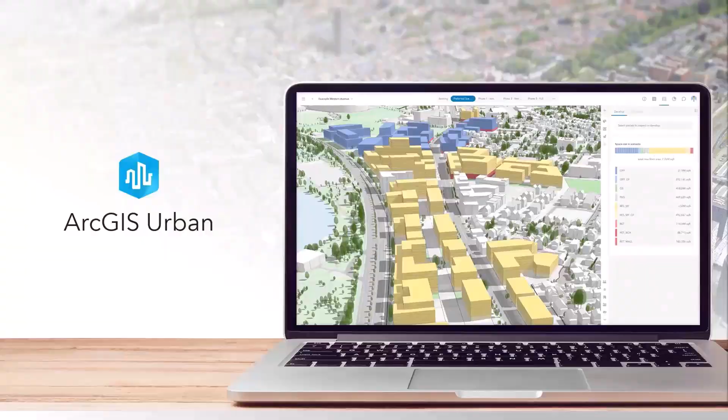A core element of Urban is the ability to test and design zoning or land use changes and visualize it. So you can analyze the existing situation, modeling the regulations, you can try proposed variances, and even find the maximum site potential.

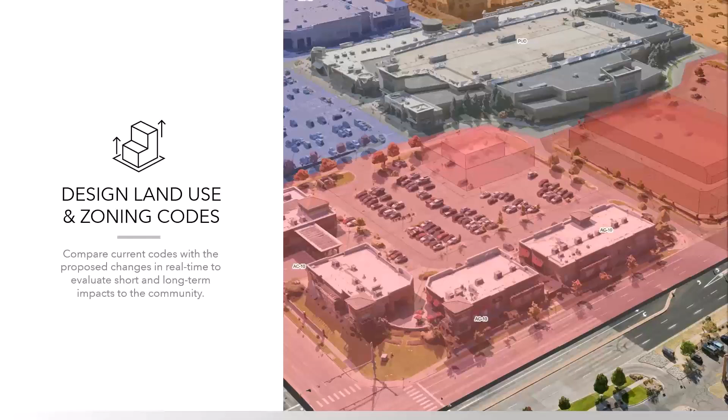Scenarios can be quickly iterated through, and concepts can be developed and then compared quantitatively, but also visually. So building forms that you see in the image are used to report on housing production, employment opportunities, mobility. And these building forms can be data-driven, or you can manually model out the site.

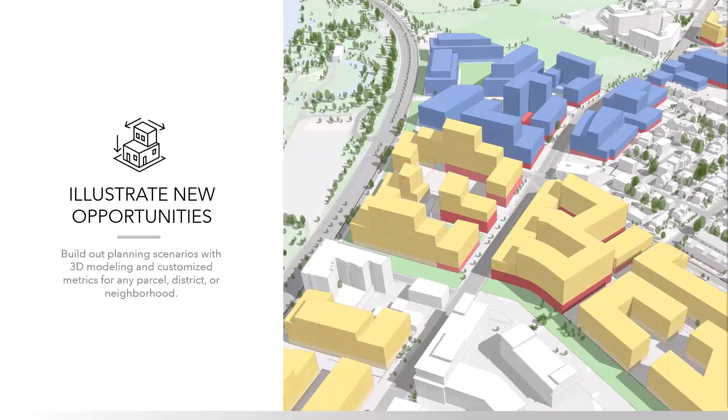We also see this as a platform to enable better collaboration between the public and private sector. Today, systems are restricted by siloed data, and there's a critical need to integrate planning data sets to speed up the design review process. So the upload of project content coming from BIM, for example, can save time during the review process, and it can also add value to more long-term planning studies.

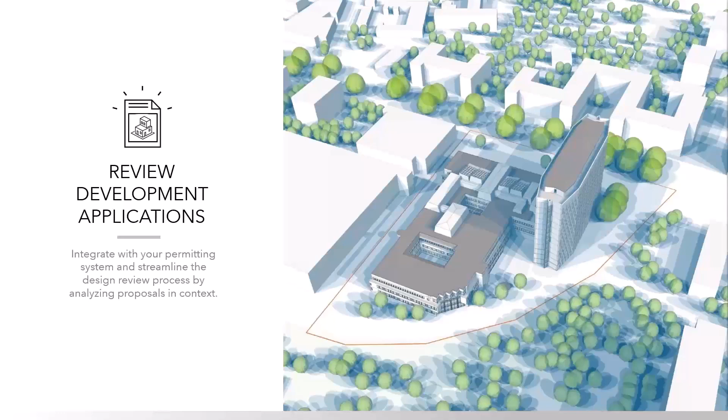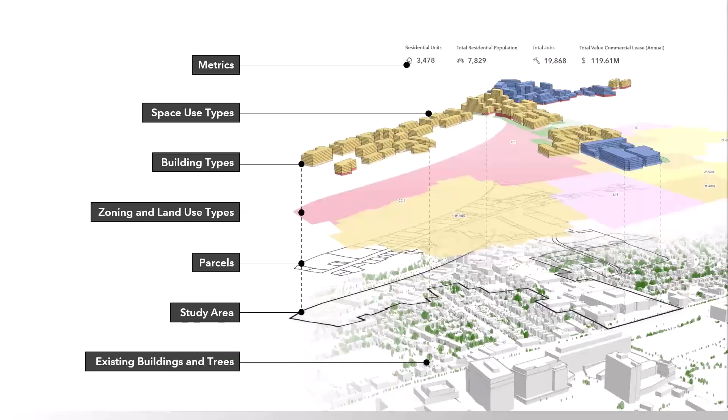We designed Urban to facilitate a data-driven planning and design process. The capabilities we'll be discussing today are built on a geospatial data model shown here at a very high level. So Urban facilitates the relationships between these layers and then provides you the best experience to model out and test alternative scenarios in your next project.

Our first guest speaker today is Dr. Sibylle Wälty, who will take us through her work in the city of Baden. So over to you, Sibylle.

Yeah, hi, welcome everybody. Good afternoon, good morning, wherever you're located in the world. It's a great pleasure to present my small hometown, almost for 20 years now, the city of Baden.

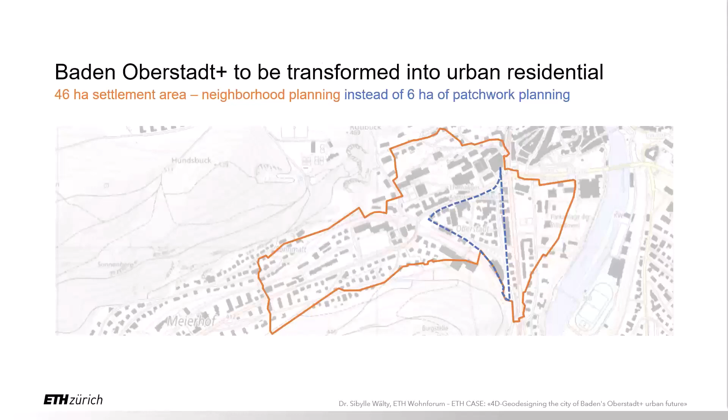The idea of the project, or basically of all the projects that we intend to do, is that we cannot transform the urban structure by planners or politicians alone. It has to be something that's well grounded with many stakeholders.

Let's just zoom into the perimeter on the left, the north. You can see in red the perimeter of the city of Baden, and then to the right, where you see the lake, you have the city of Zurich. It's about a 17 minute train ride.

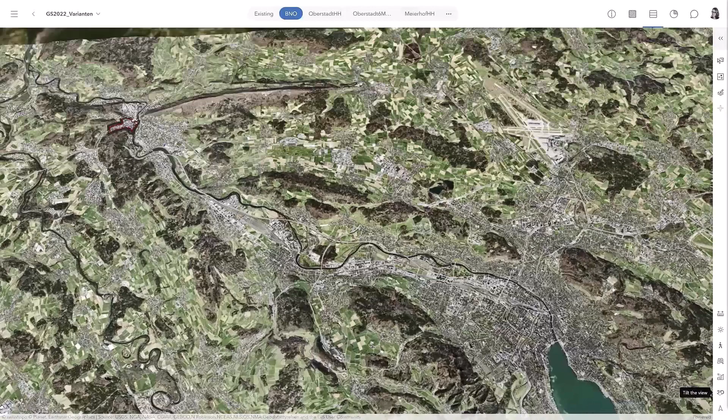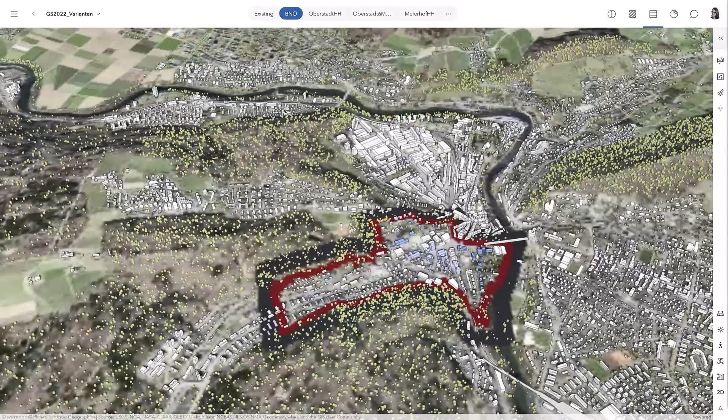At the north, you can also see the airport of Zurich for those who flew to Switzerland before. Let's try to zoom in and see how we get closer to what we will be looking at, and we have been working in.

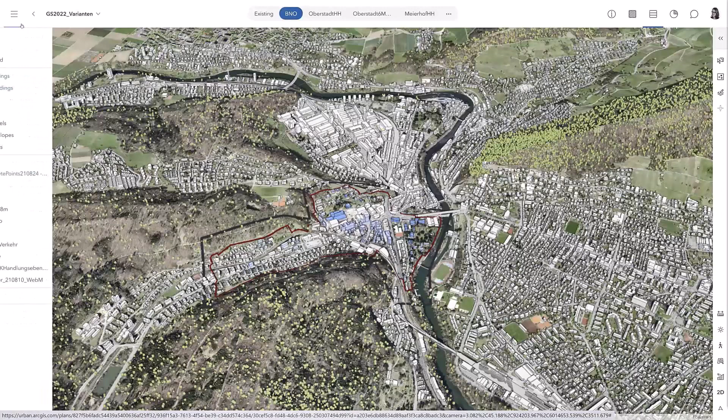The blue buildings that are popping up, as opposed to the white ones, are heritage buildings of different grades. That's why the shades of blue. You again will see at the north, east of the perimeter, that's the old town, and then the railway station at the north.

So let's take out some noise by switching from the imagery view to the schematic view, and also see where the neighborhoods are. Aside from the Oberstadt, we have Burghalde, Meierhof, and Ländli. These are adjacent neighborhoods that we also integrate into the development.

The red line is just a working line and not a fixed line. Whatever we discover to be how it should be developed in the future would also extend beyond those red lines. But to get control over the workload, that's also a reason why we selected that neighborhood.

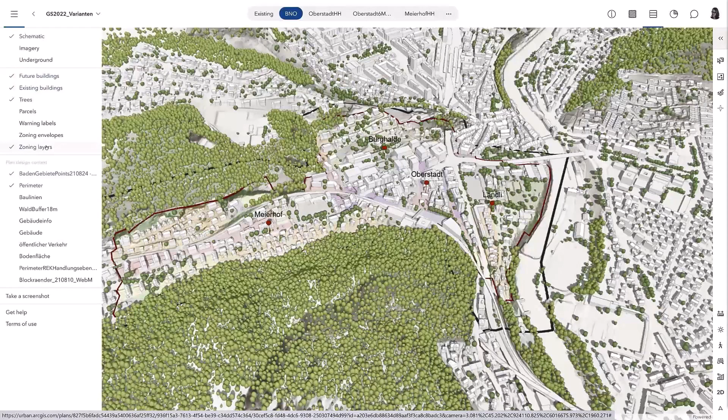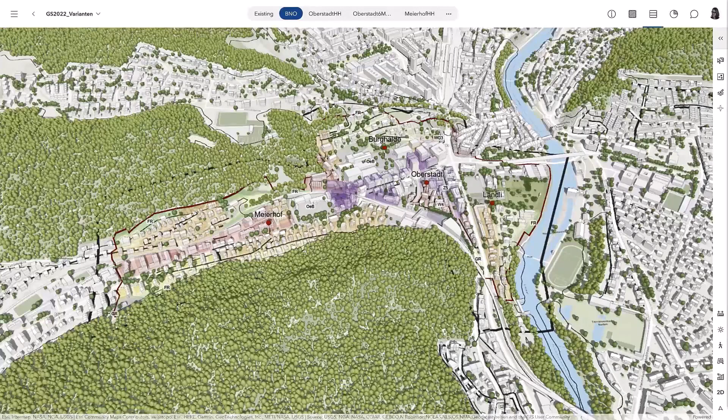What's quite handy with Urban is that you can, on the one hand, put in the zoning layers, so you can get control on what's currently zoned, and you can also add buffers for the forest or the lines for where the building should stand, so that we can see what's already there as a base to work on.

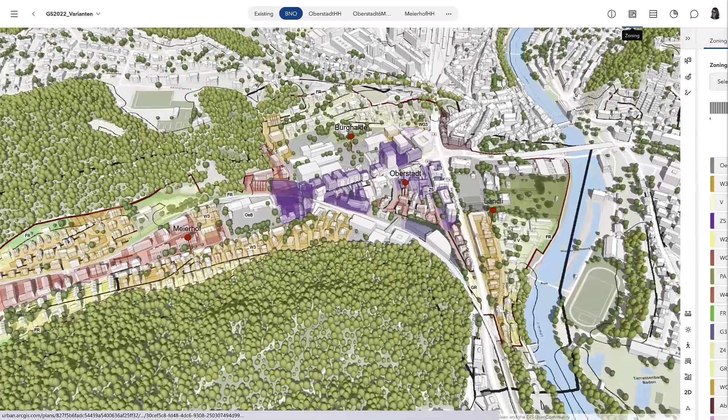What you can see here also, OEB is public area, and W3 is residential housing, 3 levels. So those are the 2 biggest shares of those 46 hectares that we have the zoning of in this perimeter. And clearly W3 is not a very high density.

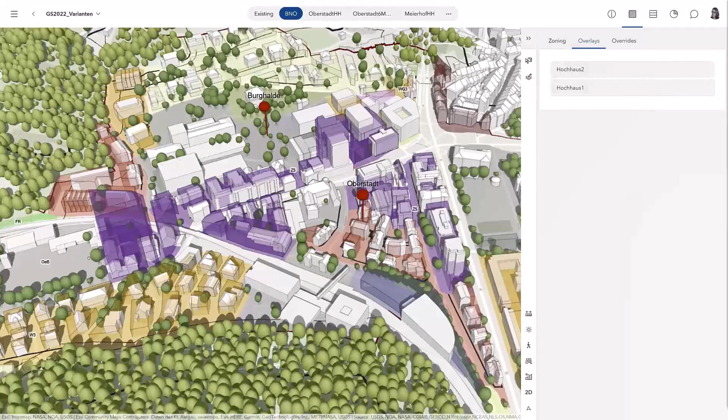What the city of Baden also has is 2 overlays of high rises. One is 70 meters and one is 55 meters. This is something that they have in a few spots within the city, not very many. Switzerland has long been very hesitant about high rises.

Urban really helps you, although in the city of Baden it's not that easy, because the definition of the setback, of the long setback, is 2 times the number of levels and 2/3 of something. So parametrically, theoretically, you would have to already know what kind of project would be on the plot to actually define the setback.

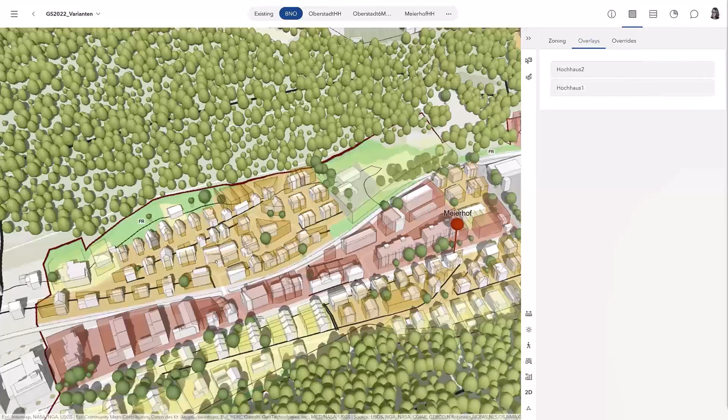That's why we kind of roughed it out here, but still we can see where things are not overlapping with what's there, and if you would want to rebuild it, where you would run into a problem.

The city of Baden, in their development concept that they released I think in 2019, the red part, the Oberstadt, means there's high potential or a high interest in transformation. The blue one a bit less, and the green one is not very focused. You have about 2,000 residents and 2,000 jobs, and what you can see here now is the scenarios or alternatives that we worked on.

To study typologies more, that we would fit the same amount of number of people within that perimeter. Initially, we aimed for 10,000 residents and 500 jobs. Due to the existing fabric and the fact that we lost

40% to forest, you can see now in the second variant that when we do not have high rise, we have to transform parts of the hillside, which has other effects visually and atmospherically than when you have high rise at the Meierhof quartier or the Oberstadt quartier in the first version.

What we also try to leverage on is the metrics that you can use in Urban. We inserted the green space areas as demanded, 8.5 square meters per residence and 5 meters per employment, something we took from the city of Zurich. Smaller cities in Switzerland always look to the big brother or sister city.

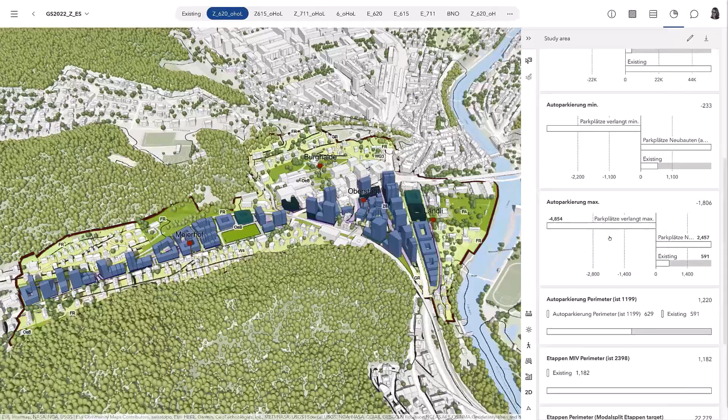many car parkings would be needed, close to 4,000 that you would have to build to go with the current zoning, which in the end will basically solve your noise problem due to traffic, because maybe your cars most of the time won't be moving anymore, because the road that's already quite loaded nowadays would be overloaded.

So the number of trips we already have would be added to just by the fact that you add parking or have to add parking possibilities - it's rather difficult not to add them in theory. Clearly the modal share would decrease in theory, but practically if you add parking it will have a negative effect. What we see here now is only 15-story high buildings, which gained higher acceptance than the one with 20 stories.

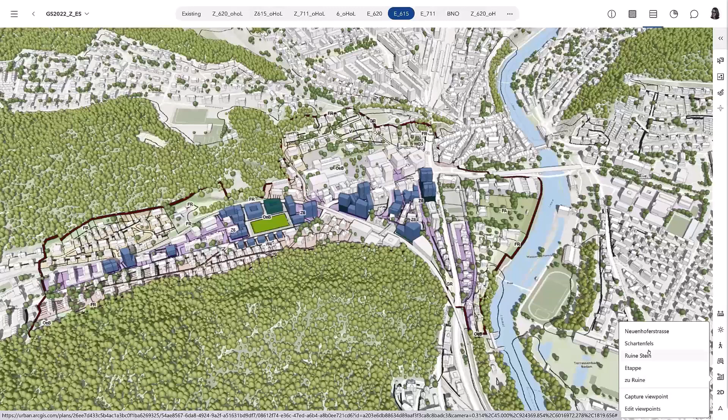Another cool tool that came out around that time is the suitability analysis, which we used as a probability analysis of building age, owner type, zoning, and protection to guesstimate which parcels would be developed more recently than others. What you see here is a first stage of development according to those probabilities we estimated, where we would expect something to happen in this first phase.

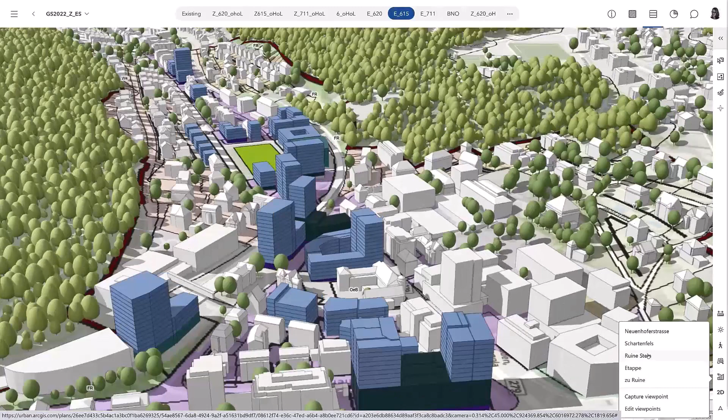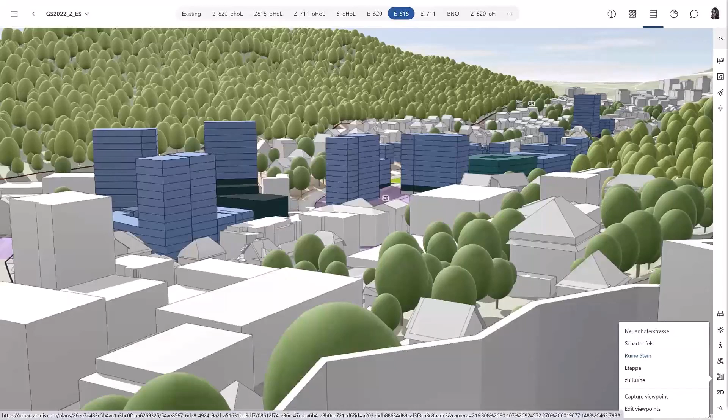We also grasped the opportunity to set bookmarks. We're now flying through a popular, famous ruin of the city of Baden, where you usually go up to get a nice look over the city. We're using that now in this digital tool, where at this stage with 15 stories, you can see we would have 6,000 people living and working in that perimeter neighborhood.

We were also striving to get a ratio of 2 residents to 1 job. This comes from the fact that in Switzerland only half of the population is working, because the other half is too old or too young.

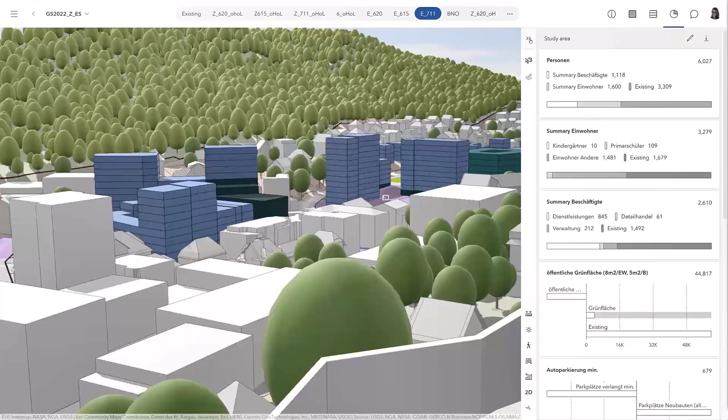What you see here now as a version is 7 stories as a base and 11 as the higher building. That's what the definition is in the city of Baden for the middle - they call it the missing middle. I know in other parts of the world the missing middle is around 5 stories, but yeah.

And then we took a view from a road axis, as if you come from the highway with your car - basically you just drive there. Not recommended to do it with your bicycle; there are other paths that are safer to do that.

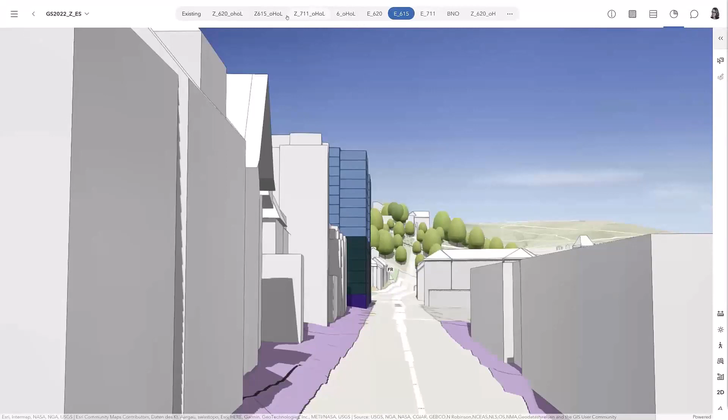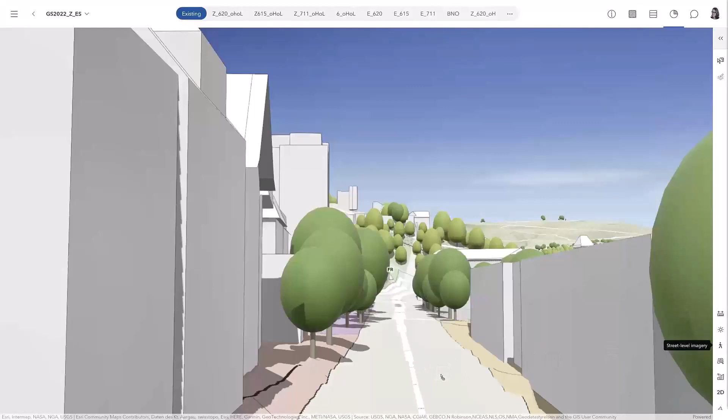Here, just for demonstration, again the first stage with 6-story base and 15, the ones that would be developed, but then also the final stage where all the new buildings would be built, in comparison to the existing, where you can see the difference in how this changed. The current building height is actually the one of 6 stories that we're used to.

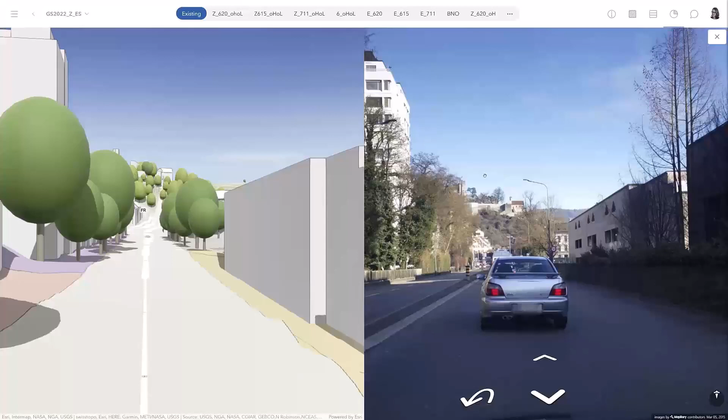And then there's the chance to have a comparison with reality. For demonstration, I'd also like to show you this built-in opportunity that you could also move along. I think that's it for the demonstration of the tool.

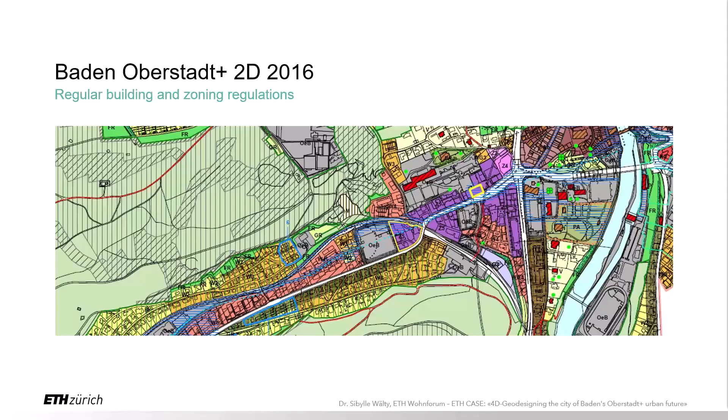So maybe just to sum up, the zoning as it currently is, is two-dimensional. We don't have any really qualitative criteria on how our built environment should look. We can see when we start using this, we get into the 3D dimension. Also with the zoning envelopes, we have the opportunity to control for the spaces that we create with the buildings we are planning to do.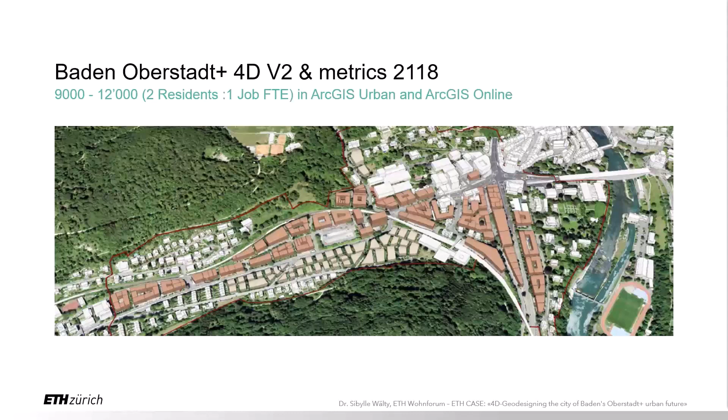And to our big surprise, the people said, 'Oh no, that's not what we planned for the city of Baden. That's just too uniform. We would like to have variation.' And that's the takeaway we took, that we then embrace this input, that we would think of different atmospheres within that perimeter. Some references, and thank you very much for your time.

Thank you very much, Sibylle. It's amazing to hear that the missing middle in Europe is 5 stories. I believe in the US it's borderline 3, if we're lucky sometimes. So that's definitely interesting. And thank you very much for your presentation.

Quick question, which of the 3 versions was the most popular? There's no clear answer to this, but the tendency was that the one with the Oberstadt having the high rise, version 1, which is closer to the city center, was favored. That's kind of common sense, I guess - the closer you are to the center, the more you expect to have more people. It would also make sense as you could more easily walk to the train station within 10 minutes from that location. So the tendency was towards there, but there's no clear message. But the acceptance for high rise is already a good message for us to take on board, to keep thinking towards this.

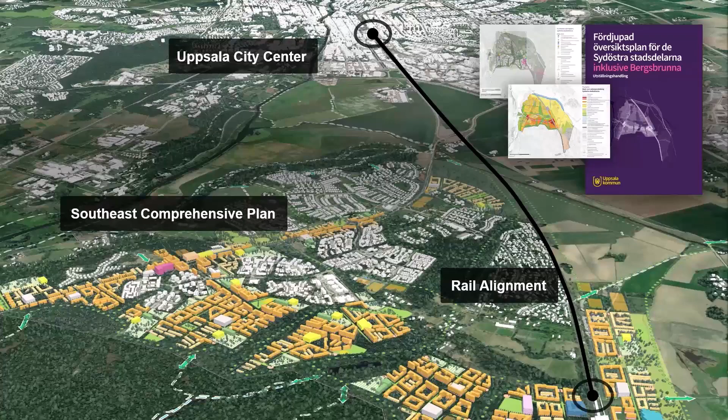A few kilometers south of the historic center is the site of the project where we have been trying out Urban the last couple of years. It's a major development where most of Uppsala's planning capacity is centered, and it starts off with investments from the state of Sweden in infrastructure with a new railway station you can see here in the bottom right. That is the core of this new district that we are planning. Uppsala had to provide 33,000 new housing units as a counter achievement in order to get this investment, and that's what I'm going to show you now - how we have been working to reach that number using Urban.

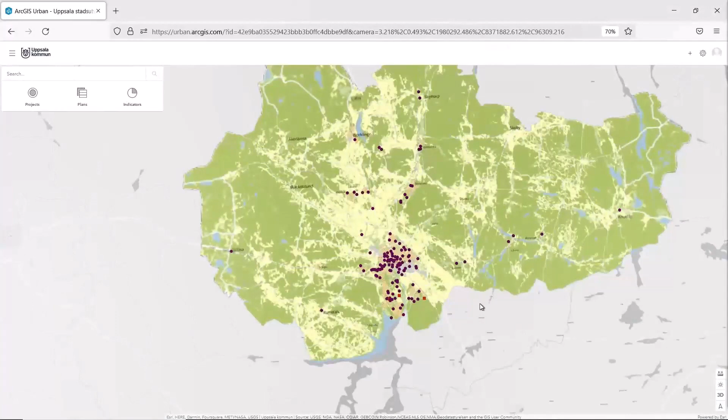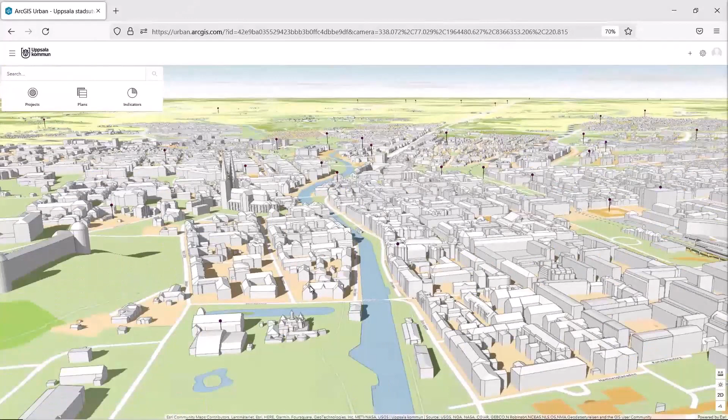This shows Uppsala located north of Stockholm. As you can see, it has a big countryside, and we're going to head back to the city center just to show you a little bit of the data that we have in 3D that we start off using Urban with.

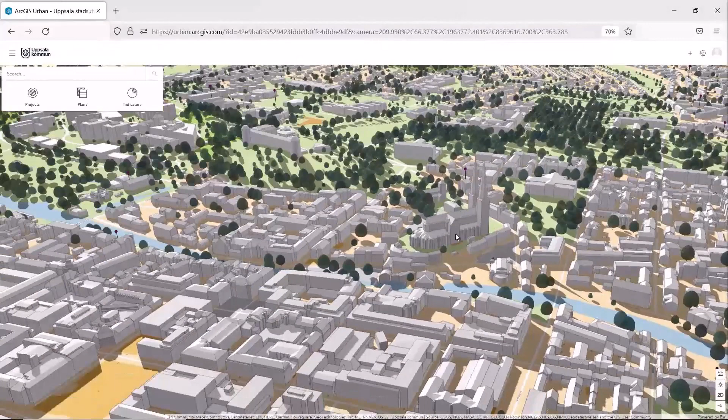So we have, from a LiDAR scan, extracted buildings, and we also have trees and topography. And this is the church again, our cathedral, and the historic city. It's very dense, it's a student town, and Uppsala is famous for its vast proximity - biking is a main means of transportation for most of the students living here, and that's something we try to maintain and enforce in the continuing planning that's ongoing in this growth.

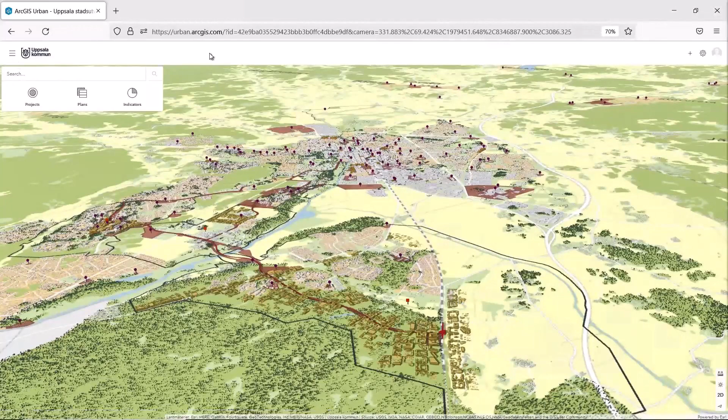Here we can see some of all the ongoing detailed plans, regulation plans that the city is working on. Here we see a new tramway that's being planned to the new station in the south, where these new districts are being developed or planned. And we have been using Urban to build project models for this. You can see these three projects, and we're going to look further in detail into this closest one, where we have to reach 21,500 housing units.

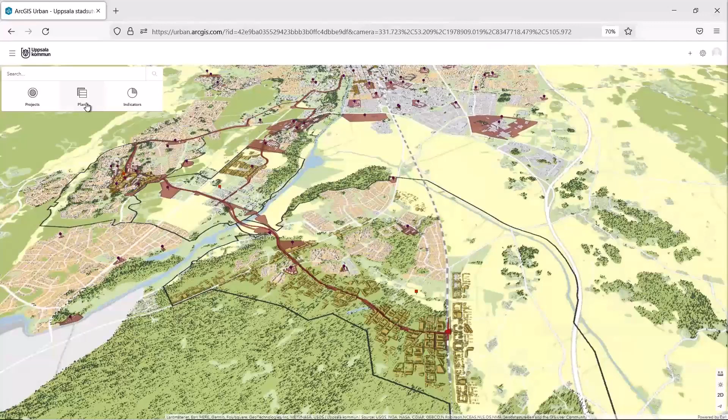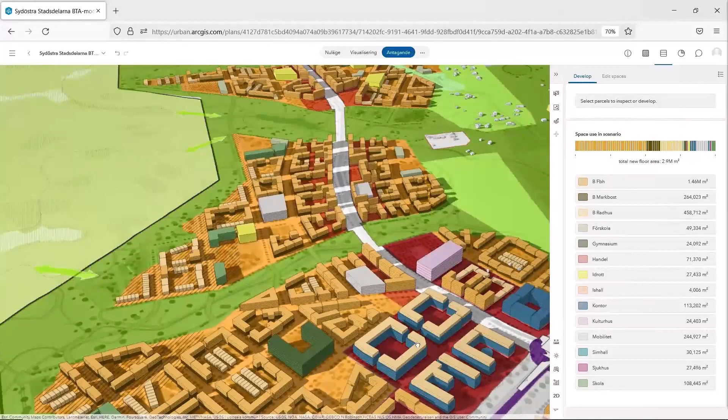So if we enter the editing mode of Urban - this is the overview that we've been looking at now, which is great for communication and orientation of where things take place. And in the editing mode is where we actually have built these models, and we have the parametric connection to all the surfaces that we create using Urban, which makes it very easy to track the content of the project and what we have in the model in different scenarios.

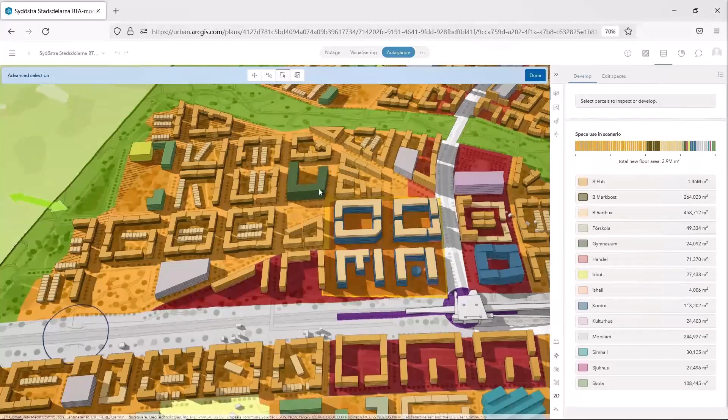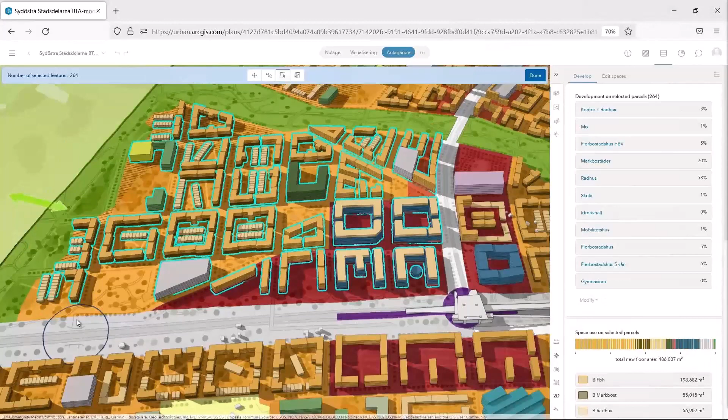I'll show you here how you can make a selection if you have a specific part of the model or the area that you're particularly interested in. You can select it, and then you will get

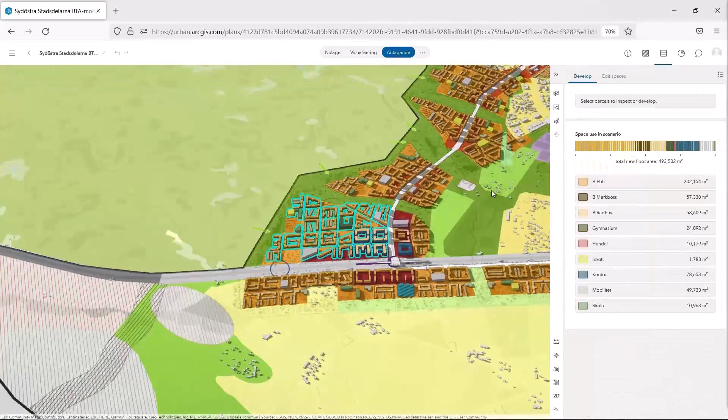this table of content represented on the site. So this is something we have been using a lot, and we have been exporting a lot of tables from Urban to keep track of GFA per block, per district, or per traffic analysis zone.

We have also been seeing the functionality of studying different scenarios. We can, for example, look at the lighting conditions throughout the year, and basically elaborate different designs, which has been very useful in this project, and it makes it kind of playful as a planner to be able to try out different structures and different scenarios.

In this project, we were very centered on reaching the target of 21,500. So the main center of the project efforts has been to study one scenario.

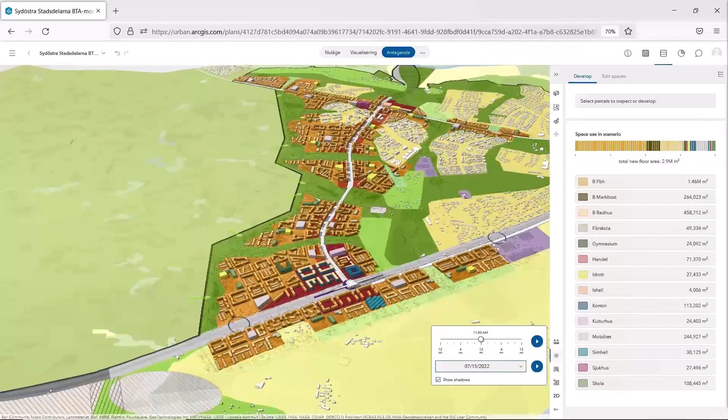We used that model that we were looking at, exported it, and published it on the city's webpage and displayed it like this during the public hearing, and it gained a lot of traffic.

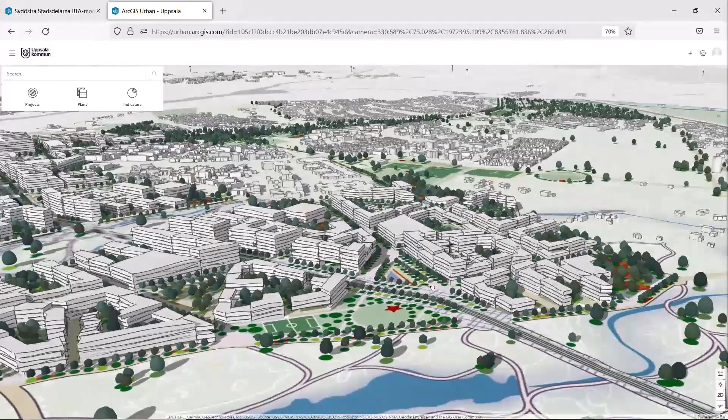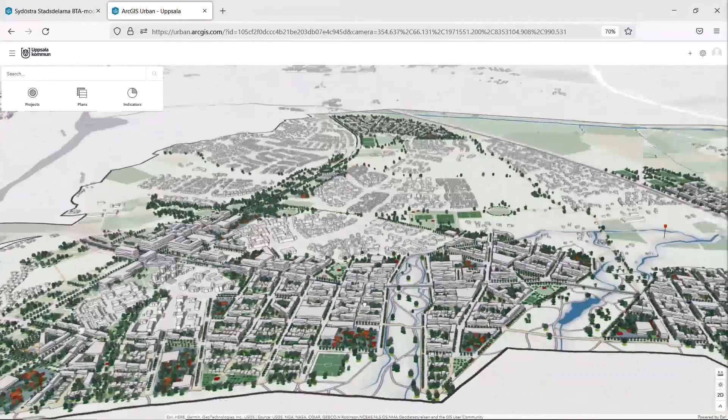Most of the visits of the project page were actually to this model, so it showed that it's attractive to look at a 3D model. I guess it's easy to understand, and you get some intuitive understanding. But it's also very important, I think.

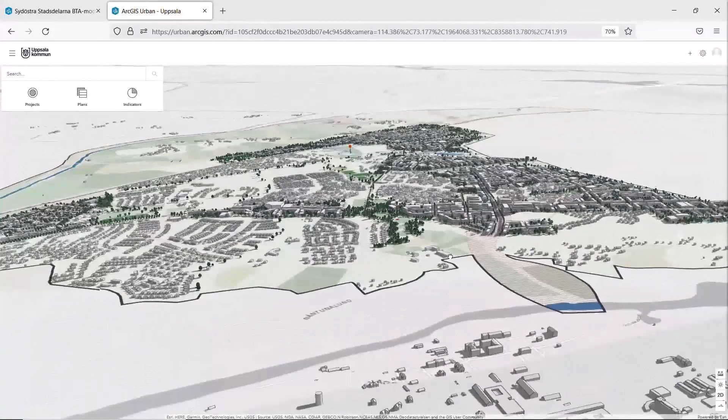We also realized that everyone sees different things when they look at it. We tried to display that this is in an early stage of the planning by using sketchy edges and abstract trees, so that it would be communicating that this is a possible outcome of the project and the planning at this early stage, but it's not the only outcome with the plans that we are making right now.

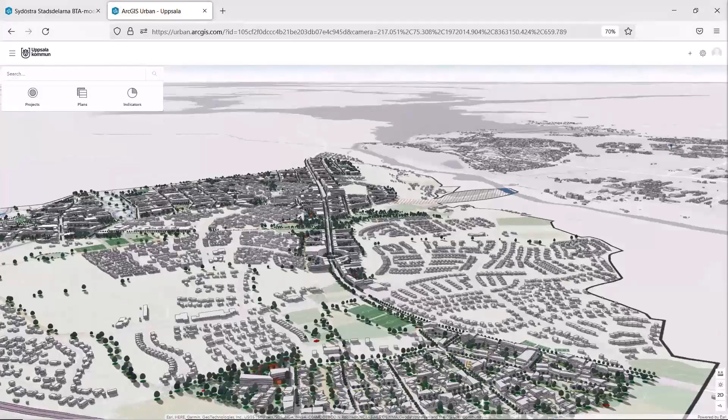This is way more detailed than what the plan is actually regulating. But this is the direction of the plan, and I think it's an honest way to show the direction of the planning, to actually draw the buildings and make it more understandable.

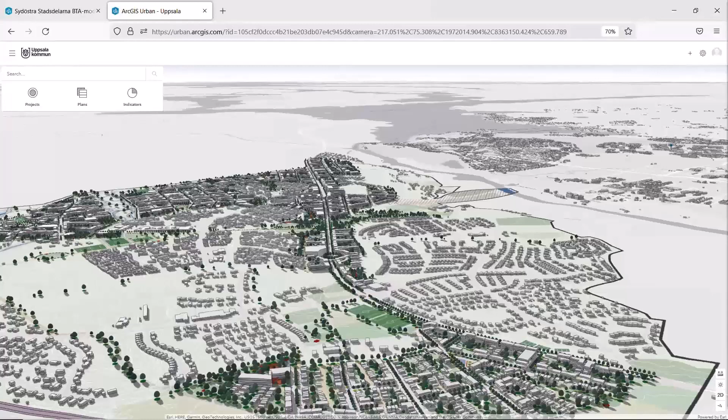But I think one of the learnings of showing this was that it would have been very useful to show at least two scenarios, so that it would be communicating that it's not set in stone, it's an open process.

In a meeting during the public hearing just before the pandemic, and we had to turn entirely digital, but also in this physical meeting, we were handing out iPads, helping and showing people how to navigate in the model and answering questions. So this model was gaining a lot of attention.

Then we move on to the next use area where we've been working with Urban, which was this visualization of the climate impact from the construction process, where you can see the time plans of construction of different stages of this project. The yellow ones are early, and the red ones are later, closer to 2050.

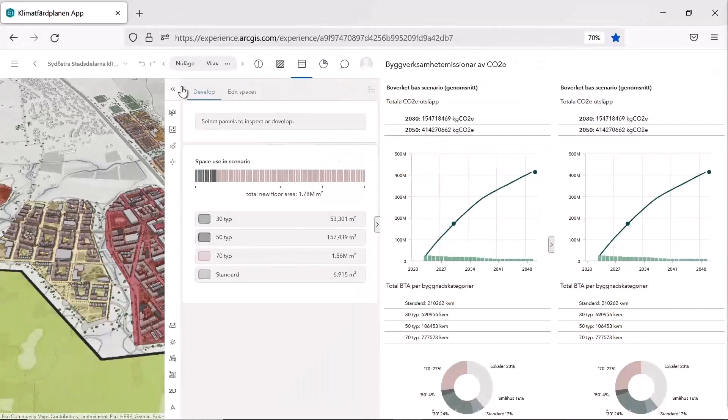For the apartment buildings that we have illustrated here, we have three increased performance types: 30, 50, and 70% less carbon emissions than what we build today. This shows how we need to distribute them in the area to reach a 12% decrease per year, which is according to the Paris Agreement.

So we have used this dashboard to trace the emissions we generate per year in the construction process compared to what we would generate with the introduction of these improved housing types. It's a little bit complicated, but it was a visualization of a pretty dense Excel sheet, and at least it becomes more understandable when you're looking at it like this.

And we saw that we could use it. We have some ideas of how we can use it. Let's move on to the next.

One idea is that we can always present developers' 3D models in the city model, so we can look at their 3D model in the context on site, and see how it sort of adds value to the surroundings, or whether it's not doing that. So it becomes a way of showing how they contribute to a district or to the city with their project.

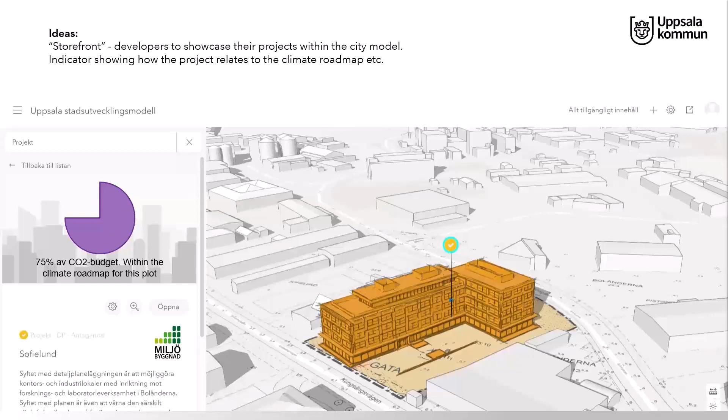Another idea, if we move on to the next, is that we can use that visualization in the land allocation process, where we have quality criteria when developers are competing for a plot. We could use this visualization about what kind of performance type your building needs to stay within as a criteria for the evaluation of the different proposals.

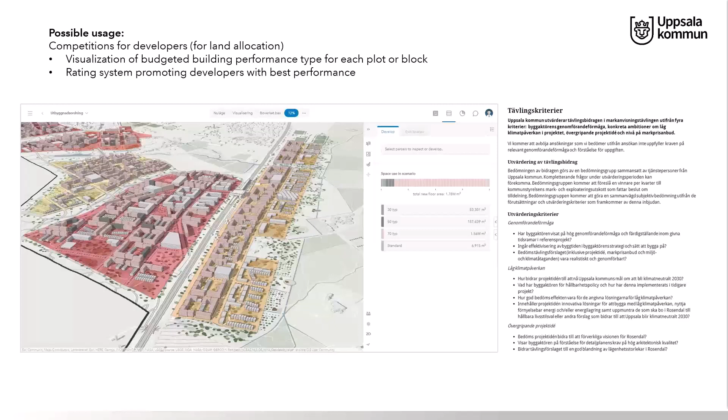So this is some of the learnings that we have made so far using Urban. We can look at this sort of wrap up with the potential that we see. It's really a communication tool. That's sort of the obvious area of use that we thought we would use it for, and which has turned out to be very, very powerful.

And we also have tried a little bit—we're curious to try the functions for gathering ideas in Urban. We think this, by displaying a model or publishing a model on a web page, really makes the planning more transparent, and this kind of tool makes it possible to include citizens to give their feedback.

But then, when we developed these models, we realized how useful Urban has been as a planning tool, to have this high level of detail in the early stages of the process—basically to have the content of the different scenarios, the reporting with different scenarios, what they contain, different use types, how much GFA we have. So we believe it can really support the planning teams, and also decision makers, when seeing this kind of 3D models rather than just surfaces on a 2D plan.

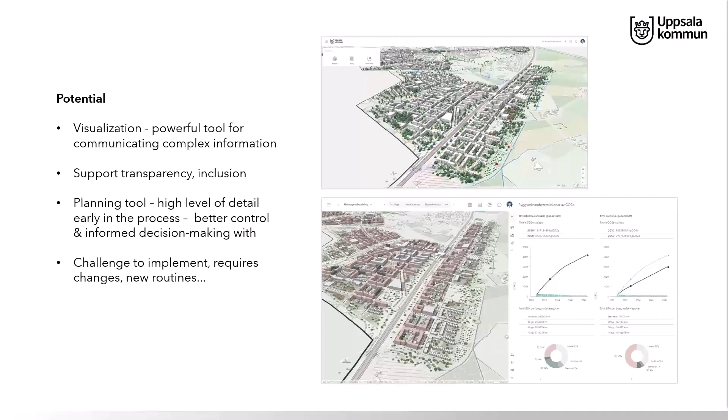If we would have all of our planning projects in the same interface, we could have much more of a data-driven approach throughout the department, and the different stages would be better connected with each other. To make that step is, I think, the big challenge we now face, to make that lift. But yeah, it's been a very interesting start with the pilot projects where we have tried out these functions. Yeah, that's all. Thank you.

Amazing work, Svante. Thank you very much for sharing. Incredible that you guys put this up on your website, generated traffic, put it on iPads. That's, I mean, the impact of a visual is—you know, they say a picture is worth 1,000 words. So it must be true.

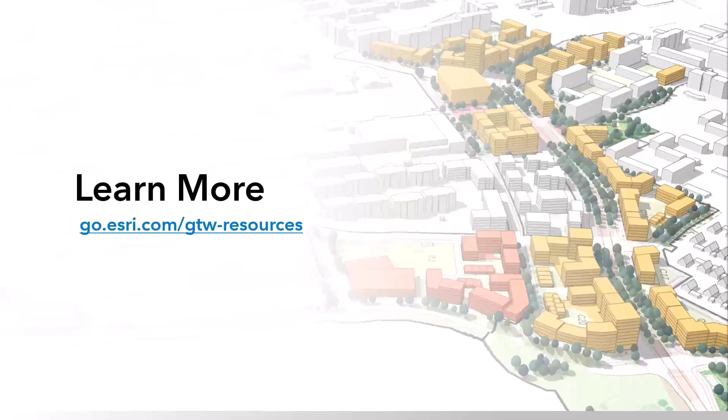So I'll ask you first, Svante, going back to the beginning of our session today—if people don't understand what digital means in the context of city planning, and you mentioned this as one of your challenges, the efforts could easily be pulled in different directions. Do you have any experiences where you needed to bring everyone to the same level on what it means to have this kind of digital approach? And how did you accommodate that? How did you bring everyone to that same level of understanding?

Well, I wish we were there, and I could say that we did it, but we did it in gathered efforts. We managed to do it for this project, and now we're looking at broadening this approach and having more of a digital workflow throughout the organization, and that is challenging, as I was mentioning. Every project has their own culture, using different projects, having different consultants and architects.

So I think we are now approaching them individually and trying to identify what workflow they could use, or how we can invite architects and consultants to the municipality to work directly in our urban models and deliver their BIM models directly, without having to do hands-on work on our own before that we have to put it in.